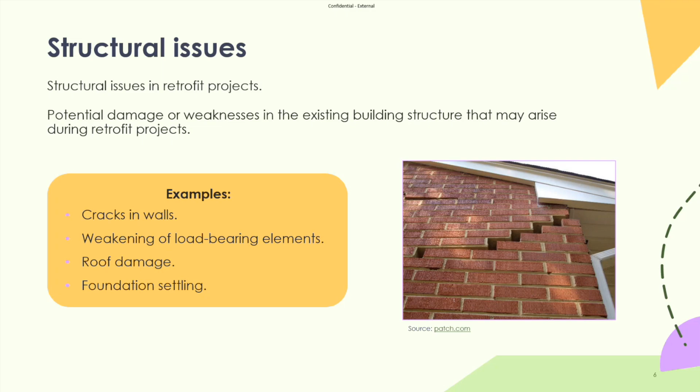Potential roof damage, and settling is obviously an issue that we have across a lot of the country, where heavy clay soils dry out and then contract, and then potentially over winter expand again, and it creates movement in the building.

Moisture and damp is a really important element within a building. We are hoping that by doing the retrofit works well, we'll remove issues around moisture and damp. But basically in the UK we have a maritime climate, and one of the things we struggle with is the amount of moisture in the air, the humidity, and we really need to reduce the humidity within a building so that we avoid risks of condensation.

That's where the moisture in the air drops out on a cold surface, and if that happens regularly, that will lead to mold growth. And as we know, it's not great to have mold growth indoors. There are obviously other types of moisture ingress. You could have a crack in the wall, you could have missing tiles on a slate. We've already talked about rainwater ingress.

You could have rising damp or damp coming through a wall where the ground surface level is higher than the damp proof course. So it's really important that we understand where those issues are coming from so that we can deal with them appropriately. A lot of damp is actually condensation, not all of it, but a lot of it often is.

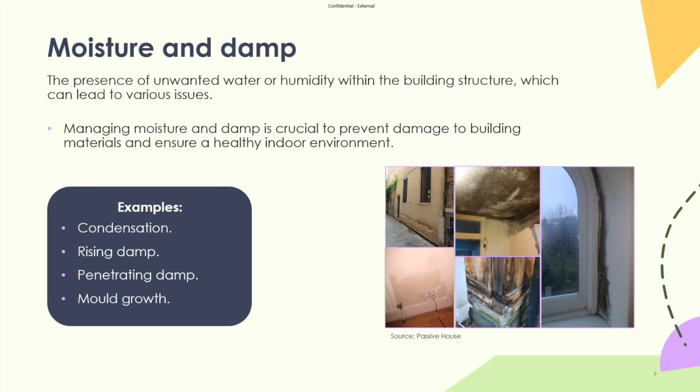So that brings us on to ventilation. A lot of our old buildings were built to be quite leaky. So we didn't tend to have as many ventilation problems in the past because windows didn't fit so well. We had open fires, that sort of thing. So we had a lot of ventilation, and it helped expel excess moisture from the building.

Over the years, we've made our homes more airtight by putting in double glazing, putting insulation in the walls, etc. We've actually made them more airtight, and for a long while we haven't upgraded them. You haven't necessarily had to upgrade homes under the building regulations unless you were really making fundamental changes like an extension. So what we've found is a lot of homes still don't have a ventilation extract from all the wet rooms, so kitchens, bathrooms, utility spaces, that sort of thing.

And it's really important that we consider this as we go ahead. Ventilation is clearly more important than just doing humidity. It helps remove stale air from the house, so carbon monoxide, carbon dioxide, VOCs, various different things like that. So it's really good for indoor air quality and managing odor issues. So it's a very important aspect of retrofit. It hasn't always been taken as seriously, but we will talk about it a lot in our masterclasses because it is very important in that process.

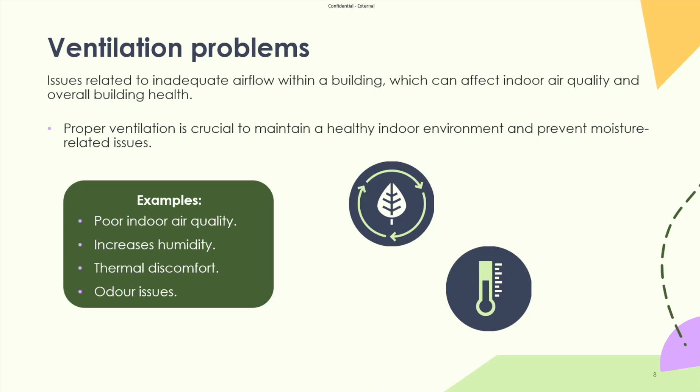You can have a continuous extract, which is similar to this, but runs all the time and increases when there's a higher moisture level. You could have localized room extract, you can also have a heat recovery system. You can have a centralized system, so an MVHR is an example of that. So there's lots of different approaches, and it needs to be designed appropriately for the building and the level of airtightness that we're going to try and achieve through our retrofit approach.

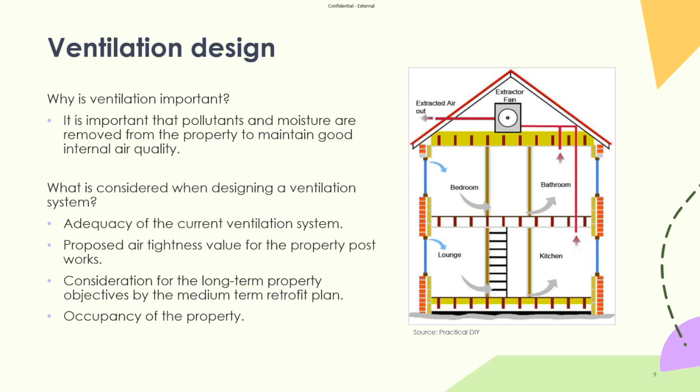We should also consider the number of occupants in the building at the time the works take place. Certainly there is a recommendation of what type of extract you need based on the number of rooms and the number of occupants. This is all really important because it's all part of the considerations around occupant health.

As I'm sure you all know from Awaab's law, excess moisture in a poorly heated home or poorly insulated home, one that can't retain the heat in the walls, will result in mold growth, and that's really not good for our health, particularly when you're young and your lungs are still growing, but also if you have other respiratory illnesses, if you've got heart disease, various different issues around cold and damp and moldy homes that are really not good for our health.

And it directly impacts the health service and the number of people using the health service. And if we can't resolve it, they come out of hospital and go back into a home that again is not great, and could make their problems come back. So it's really important that we think about the occupants of our houses and why we're designing them the way we are.

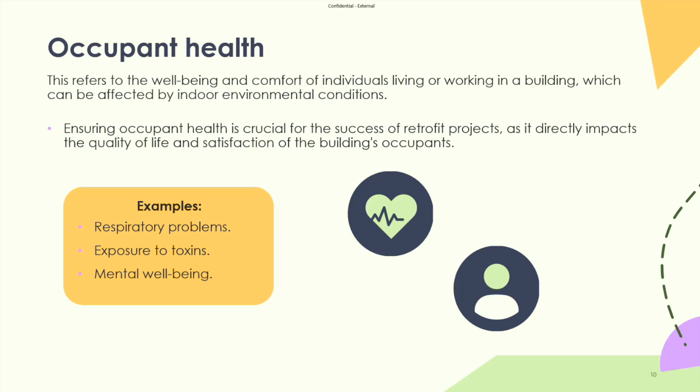Okay, so we'll have a look at some of the risk identification approaches. There's various approaches you can take. So there's a sort of brainstorming. Some people don't like to use that word anymore and prefer to use a thought shower. But anyway, sitting down and thinking about different things that could impact. So as a team, it's a discussion process where we all use our experience and ideas to come through that.

Thinking about the root cause analysis, so investigating the underlying causes of those risks. When we looked at some of those risks at the beginning around movement and damp and mold, it's really important that we absolutely understand what the risk is. As I said, sometimes damp is considered damp, but actually it's a condensation issue. So we really need to understand what we're treating so that we can treat it appropriately.

A SWOT analysis can be useful. It's looking at strengths and weaknesses, opportunities and threats. You might want to do a strengths and weaknesses about different approaches to retrofit and how it could resolve an issue. You can do expert interviews in terms of consulting with appropriate people, experts within the industry, particularly where you may be not sure about particular causes of issues, thinking about structural issues or particular areas around damp penetration or condensation risks. So it's really useful to think about the most appropriate route to doing risk identification.

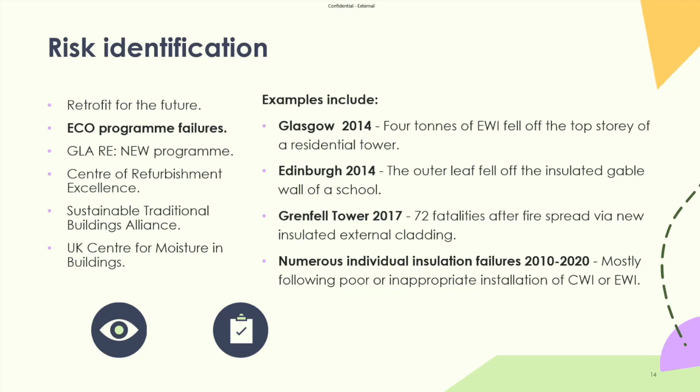So the next on our list is the RE:NEW program, and that was a GLA-run program.

Okay. We then got the Centre of Refurbishment Excellence, and anybody that will know that, that's CORE, and CORE became the Retrofit Academy, or it wasn't maybe quite as seamless as that, but certainly out of CORE, the Retrofit Academy did rise like a phoenix. So I think a lot of learning took place there. So it was an EU funded project.

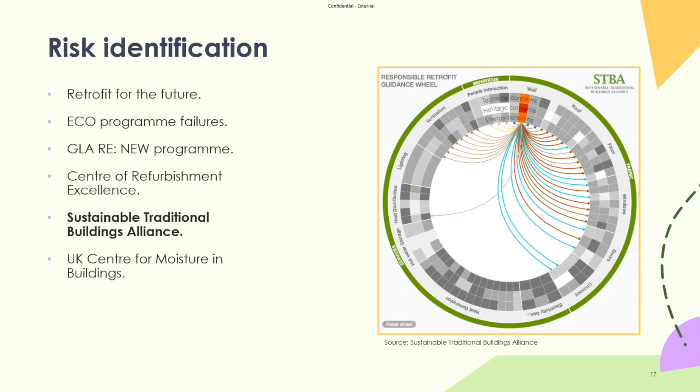And then out of all of this is the UK Centre for Moisture in Buildings. It's probably getting on for about 10 or 15 years old, I think, as a sort of centre for excellence. And they've been really influential in driving the progress towards improvement in ventilation in retrofit and consideration of other things.

Certainly I've worked with them and the STBA to develop some tools around thinking about moisture and condensation within a building, and they have a lot of really useful detailed scientific research. So again, if you really wanted to look into that, it's a really good place to have a look for more information.

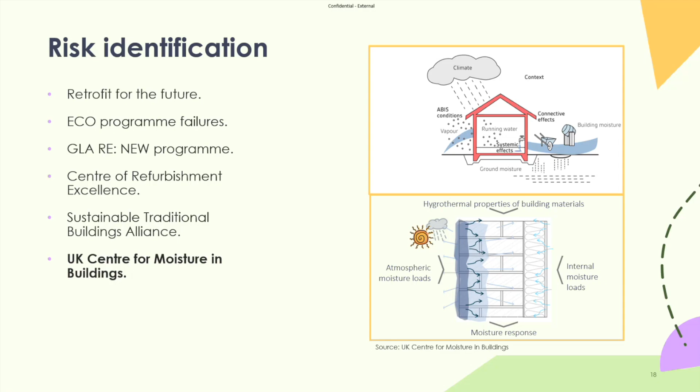Okay, let's have a look at some risk mitigations. So we're going to just work through the 4-part process, which is thinking about risk assessment, design, installation, and operation. So some of the risks that come up: you have the wrong assessor. So what's the wrong assessor? Somebody perhaps that isn't skilled enough for the type of property, perhaps doesn't have the right qualifications, perhaps doesn't have any qualifications to do the assessment. So it's really important that we start with the right people to get a really good outcome from the beginning.

Inaccuracies in assessment. There are so many assessments out there that are inaccurate with wrong wall types, saying that it's got gas heating because it's got a single gas point heater and no other heating in the house, or everything else is electric. So there's always lots of things that you could do a sense check on with any EPC data. It's getting better over the years, but some of the older ones in particular are quite poor.

Consideration of incorrect measures. Well, if you say it's a cavity wall home, you would then be saying that cavity wall insulation might be a good solution for that property, but it could be that it's a solid or timber frame construction, and therefore cavity wall insulation would probably not be an appropriate measure for that building. So you're then giving people wrong expectations about what they can do.

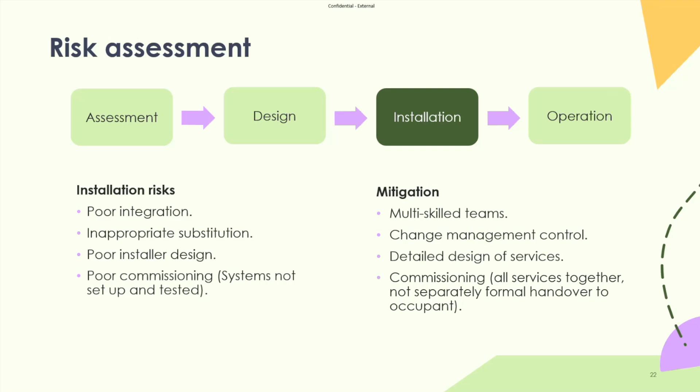So hopefully on the next slide, in operation. So we need to think about that handover procedure. So what have we done and why? And what does the client, the occupant, need to know in terms of how they use the building differently from how they've been using it up until now?

And that can be a very big challenge for a lot of people, particularly if they're older and they've lived in the house for a long time and they've had the same sort of systems. They've got completely used to doing something, so that'll be a massive change for them. And they may not be up to speed with some of the digital elements of new installations. So it's really, really important that we consider all of this at the time of design, but take those customers through that process.

Controls are incredibly important. We talked about setting controls for the right time zones and to come on and off at the right times, but also choosing the type of controls that you put in is a really useful approach to take. Now, I'm going to use me as an example. When I first moved into my flat, I had a really good control system, temperature control, timer control. I didn't do zones, I've only got a small flat, but it did lots of different kinds of days, and six different settings in the day.

It was fantastic. But the buttons on it were so tiny. I used to have to try and get a pen out to use it, and it became so infuriating. I changed it. And what I ended up getting put in, and I'm not sure if it was my mistake or the installer's, has less flexibility around how it's timed, so I can't do a weekend separate to a week. It's exactly the same, which frustrates me enormously, but the buttons are really big and I can use them and it's really easy to work through.

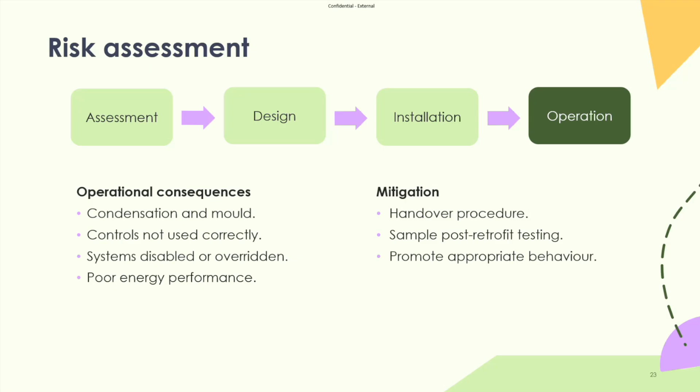Okay, let's have a little look at risk management in PAS. So hopefully all of you are very aware of PAS. It's a process that is there to support the correct installation of retrofit measures. The retrofit coordinator is the key role within that, and they are responsible to the client and to the public. So that is a really important element. But one of the things that's useful to think about within the PAS is the 4 C's. So they are context, coherence, capacity, and caution.

So we need to think about the geographical location. Is it right by the sea? Is it wind-driven rain? Is it on the east of the country? Are we going to have overheating risks? What's the context there? We need to think about the legal context in terms of the type of installations that we might do, what grant funding we might be using, the ownership of the property, various different approaches there. And we might need to think about things like cultural differences in how people live in their homes and use the homes differently.

So coherence is looking at a really consistent approach to the thermal performance of the property. What we want to try and avoid is any particular cold spots where any excess moisture in the air could condense and cause issues to air quality over time. So that's what we're looking for on that one, and we bring in there the ventilation and the air quality issues as well.

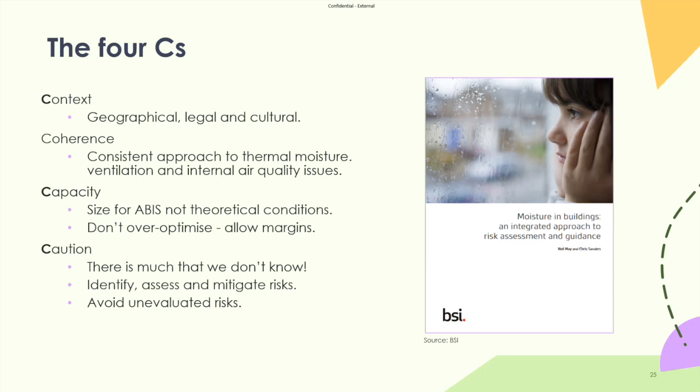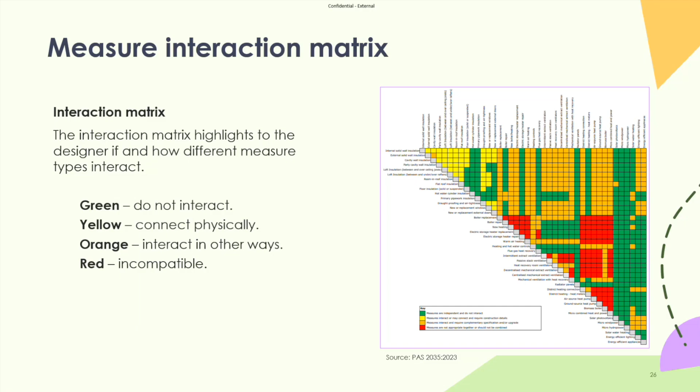I'm not going to go into this in too much detail, but this is an expanded version of the one we looked at under the Renew program. It really details out what the risks are, etc. So resident engagement, we've talked about this a little bit already. So I'll whiz through this as quickly as I can because there's quite a few slides.

So we want to reduce the risks to residents through our design process, but we really also need to think about the residents that are going to use the building, and think about how we can reduce the risks around resident behaviour, resident use, that side of things.

So this is why resident engagement is so crucial for driving success in retrofit, and particularly where we're bringing in unknown or untested technologies. So we talk about heat pumps here, but there are other technologies or approaches that could be similar in that. I think ventilation is probably one that people have experienced over delivering under the recent HUG 2 and Wave 2.1, 2.2 programs. I think engaging, consulting with residents, taking them on a journey helps bring them along with you, and it helps them ask questions, because we don't all have questions.

I suspect not everybody on this call is going to ask me a question at the end of this, but maybe you can surprise me.

We won't all have questions while we're in the moment. We'll need to go away and think about them. They might not be something we think about instantly. You might be doing something one day and think, oh, I wonder if that's going to be impacted by this thing that's going to take place. So the earlier we can engage with people and take them on a journey, the better buy-in we're going to get, and probably the better outcomes we're going to have.

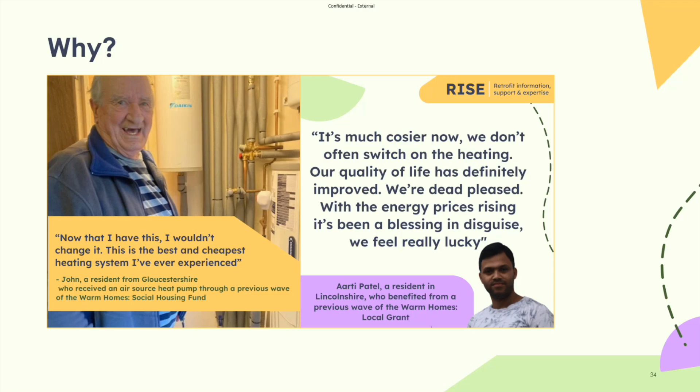So please do consider reaching out to RISE if you are a grant recipient and you haven't spoken to us yet. Do get in touch, because we can provide you with support to help you identify risk and minimize risk in your project, and help things go along better. So I think that's probably it.

There is one here about a mobilisation confidence assessment. So I'd better talk about that, because that is quite crucial to this. This is for all social housing fund grant recipients. We would really love you to book in a mobilisation confidence assessment.

So that's looking at where you are now in your mobilisation journey, and how you get to that point for delivery, and seeing how we can support you to get to that point on time or quicker, reducing the risks, or helping you with a better approach if it's necessary. So do reach out via the RISE inbox if you haven't been contacted already, and we will get in touch with you.